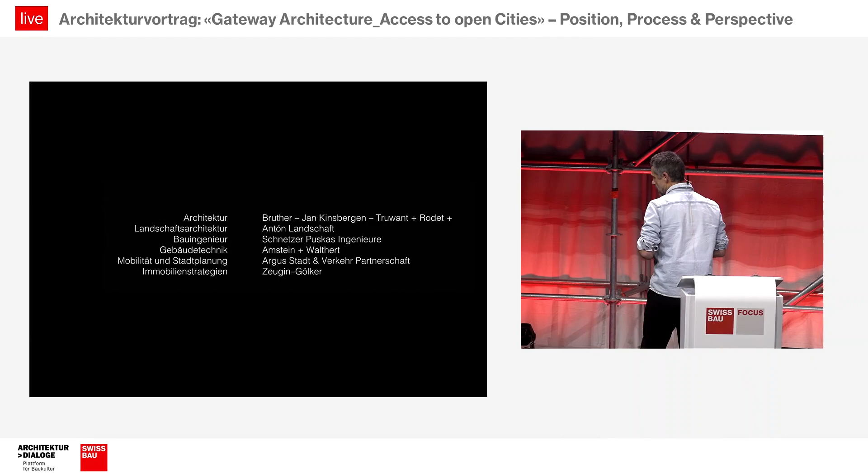That's not really a problem, but let's say maybe I should explain a little bit more about the context, and probably about the team, because for such a problem, such a project, this amount of issues, you need a team. And the team is, of course, quite crucial. In the team there are a lot of engineers, and at first, probably a set of leaders. So we are, let's say, one part of this team, Bruther.

And of course we have some fantastic partners, 2 of them, I mean Truwant+Rodet and Jan Kinsbergen. So it's not the first project, we did a set of projects, a set of competitions. We lost all of them. But we built a sort of common ground with a set of preoccupations.

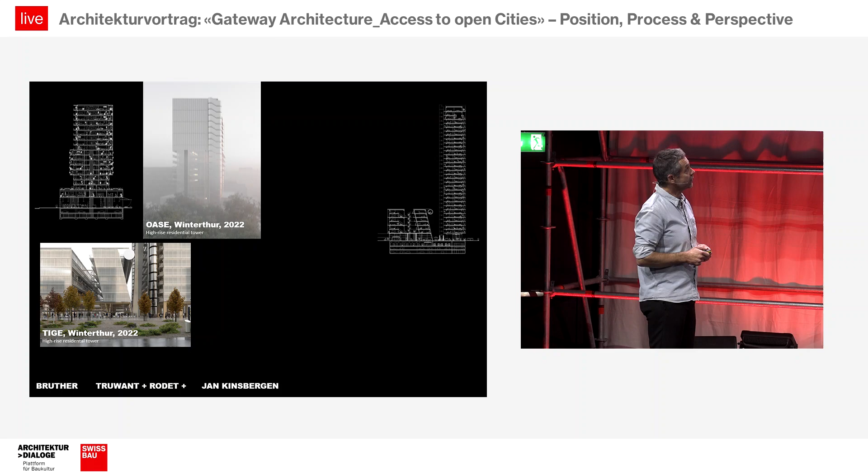So we did a lot of competitions for towers in Winterthur. I'm not really sure I have a precise explanation for that, but it was fantastic research about how to combine different types of program. And at first, let's say this urban preoccupation - how a really simple device, an architectural device, can transform the city or can amplify the city. So these were different types of competitions, and all the time it was a fantastic experience, fantastic collaboration, and fantastic discussions.

And then when we saw the application, we said, okay, we should go and we should try. Probably we are not, let's say, maybe we will be selected. And we've been selected, and it was a fantastic moment.

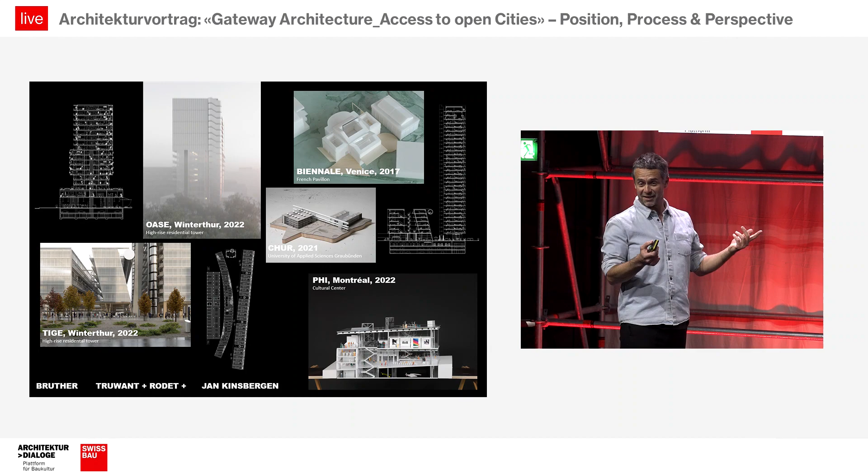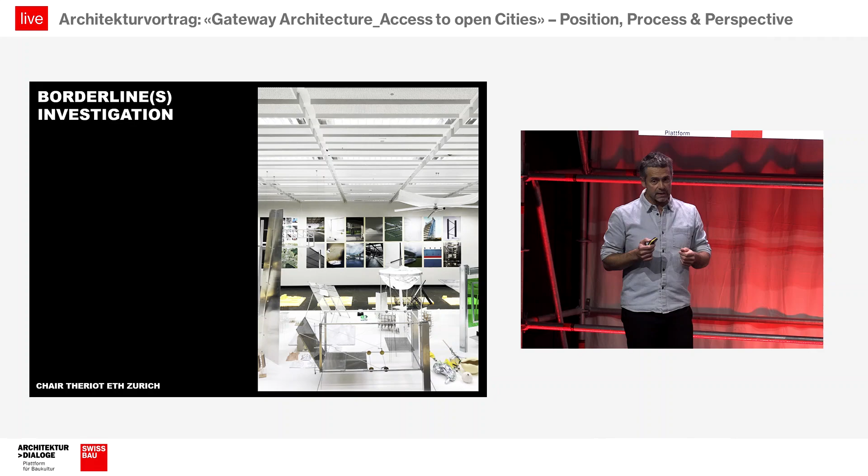Probably because we have this practice at ETH, we have some preoccupations, and Basel is one part of those preoccupations. So mainly, our preoccupation is air, comfort, lightness, multiplicity. This is more or less the topics we deal with every semester, and every semester we deal with a specific territory.

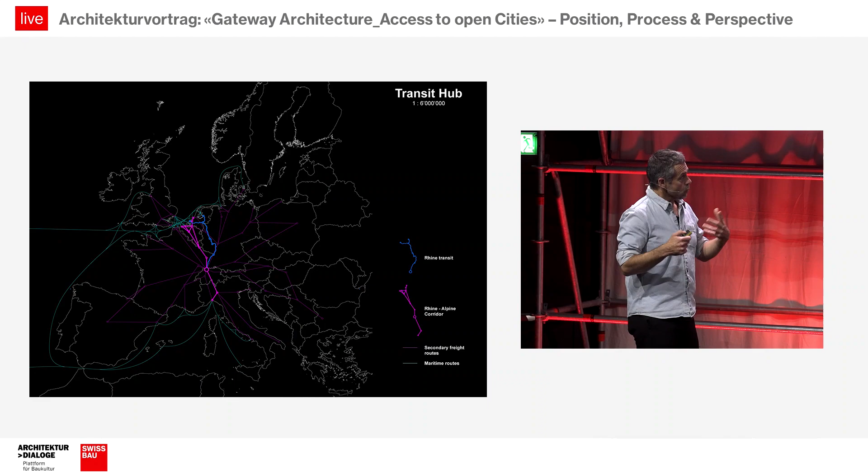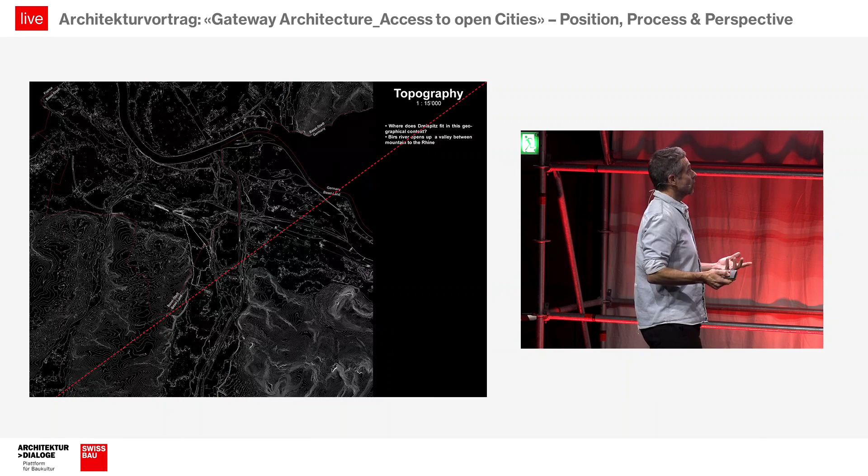And four times we worked with Basel, because we are quite stimulated with Basel. So we did a lot of research just to try to explain exactly what Basel is in terms of infrastructure and organization. Each document is not really important, but the main preoccupation is this urban question about how to transform the city, and what could be the tools to transform the city, in our case, just by dealing with constructions and buildings.

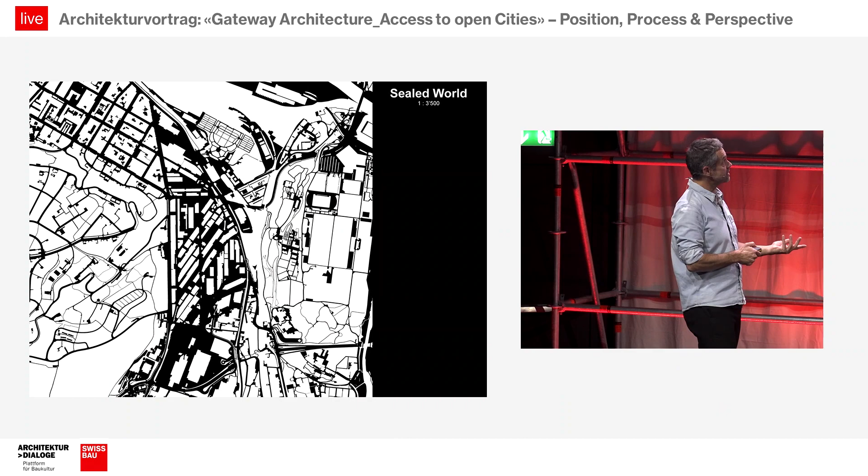So these are different situations, so probably you know this is the Dreispitz, about history, about how to transform, what about the density we should achieve, should we demolish or should we keep things, what about the climate, what about the future.

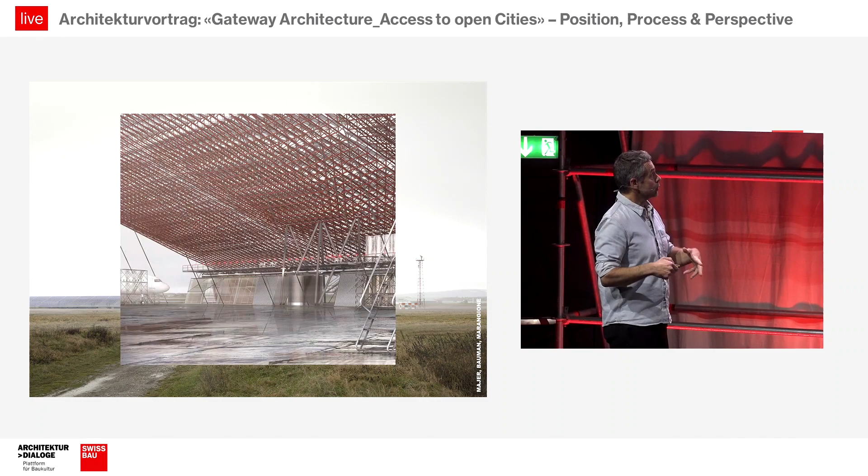So this is really a set of researches we did with students, who are not architects, or will be, or some of them are already architects, but just to see again how we can transform the city. Also because the airport is one part of the city, how to increase the potential.

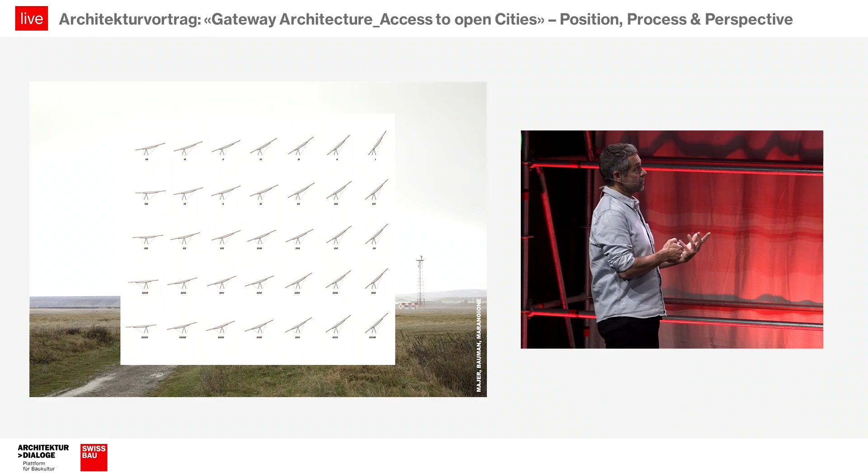Because we talk about gateway, and the airport is also a sort of hub, and also a place, a sort of entrance into the territory. So this is really not too long, considering the time we have, but just to say there are different situations in the city that we can transform.

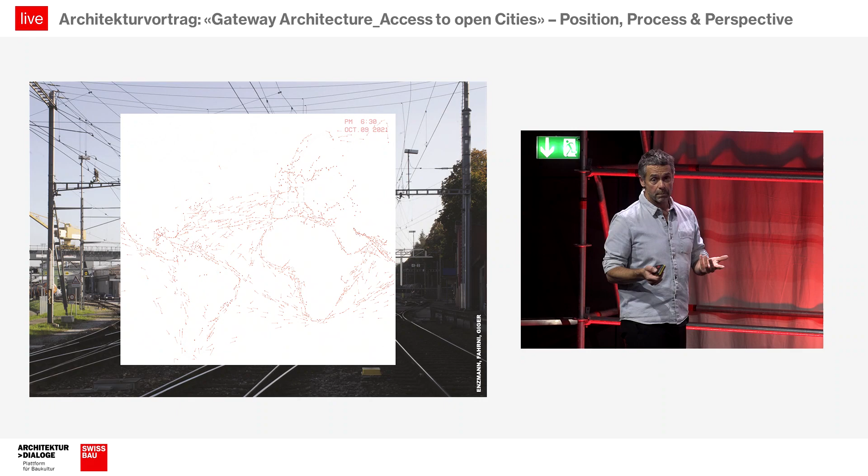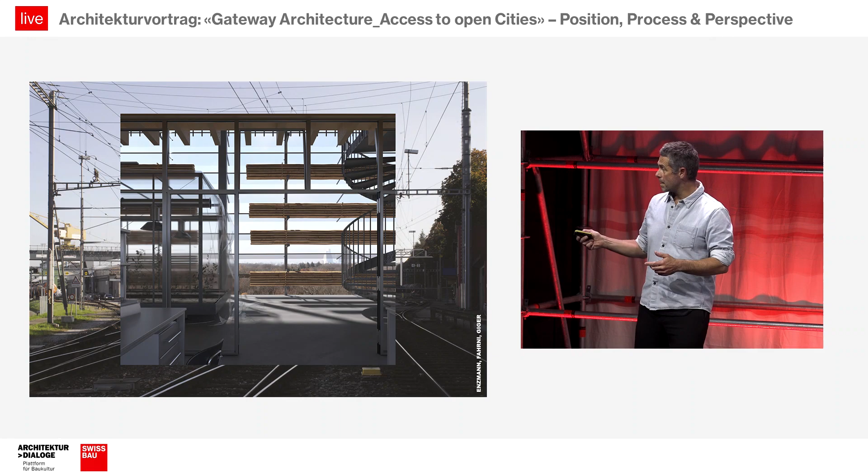That are part of the city, even if it's industrial plots, situations, but we have to consider them because they have potential, they have fantastic opportunities in terms of landscape, in terms of use, in terms of space. So this is just a set of different, diverse documents just to see the potential of Basel.

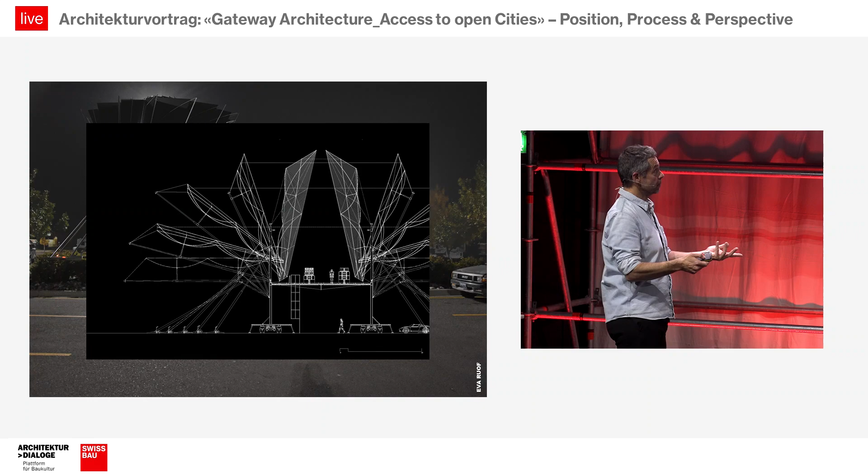And of course, I will try to go faster because there is probably too much, but the port is of course a part of this research, so how to produce quite specific infrastructures just to bring new uses, how to transform maybe

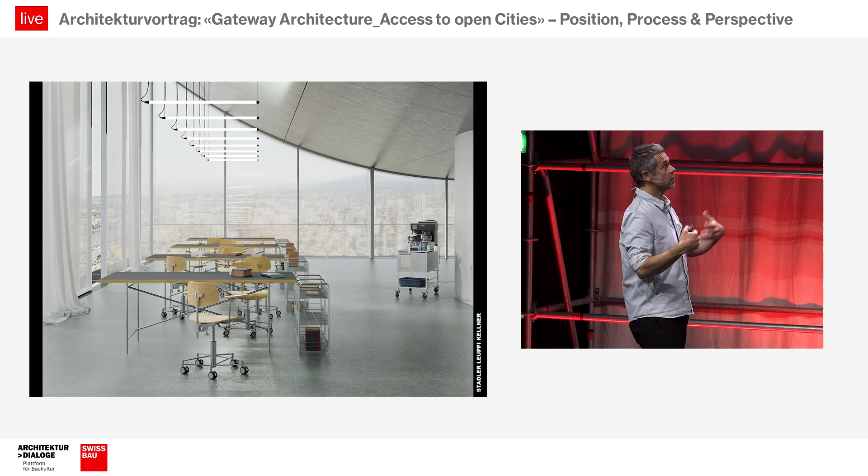the Novartis campus into housing, so that was a part of the process. But of course, each time it's asking questions about the future of the city and what are the potentials.

So I will probably not describe the images and maybe talk about temporary structures. So what is a space? Do we have to build for the next 100 years or do we have to build temporary structures? So this is just a set of examples.

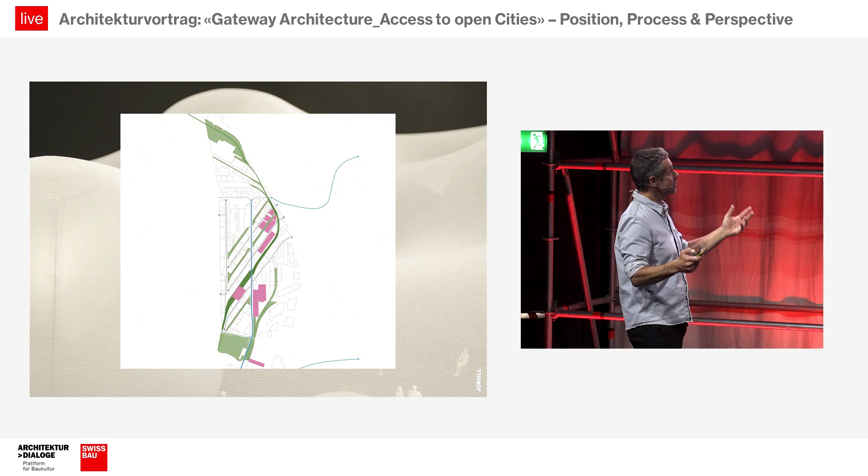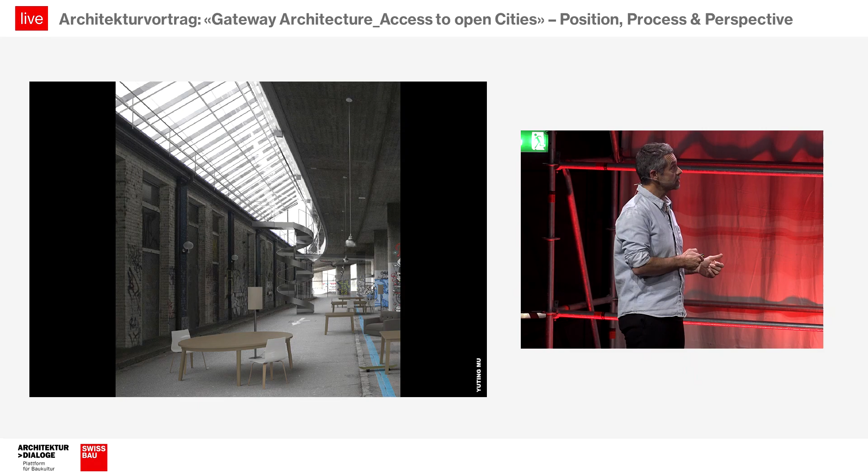Just also how to teach what could be, let's say, how to produce energy and how to deal with this kind of infrastructure. So a lot of images, just to talk about the city. This is probably what we try to deal with with the new generation, and just to say what could be the possibilities in terms of transformation.

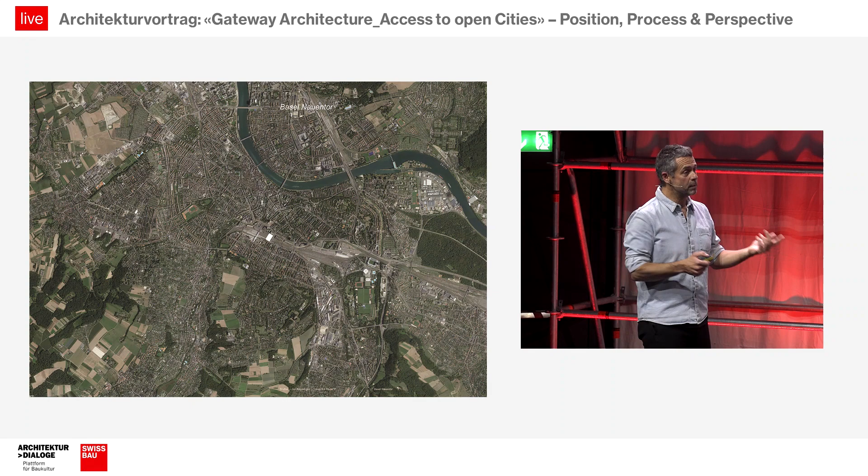So you know the place maybe more than I know, but this is a fantastic situation. This is a fantastic building, so you know it quite well. This is this sort of huge, dead infrastructure in the middle of the city.

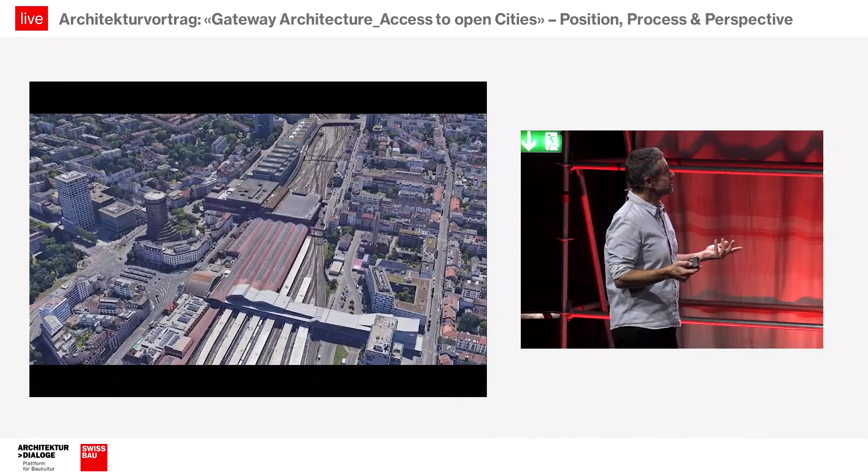And I think all the studies that happened before we won the competition were really crucial, to say there is an important challenge for the city just to reinforce the links between the two parts of the city.

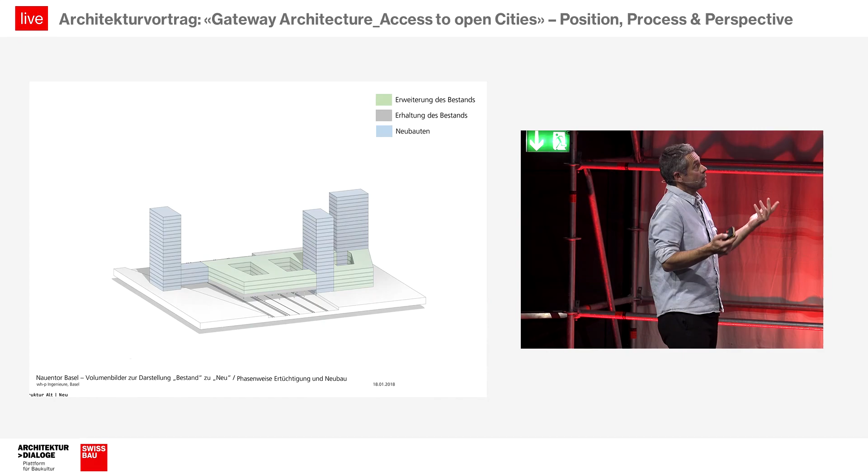So the brief was quite simple, quite efficient, and not really a lot of ways to escape, or let's say, the form is the form, but we have to explain the form. So that's, of course, our preoccupation.

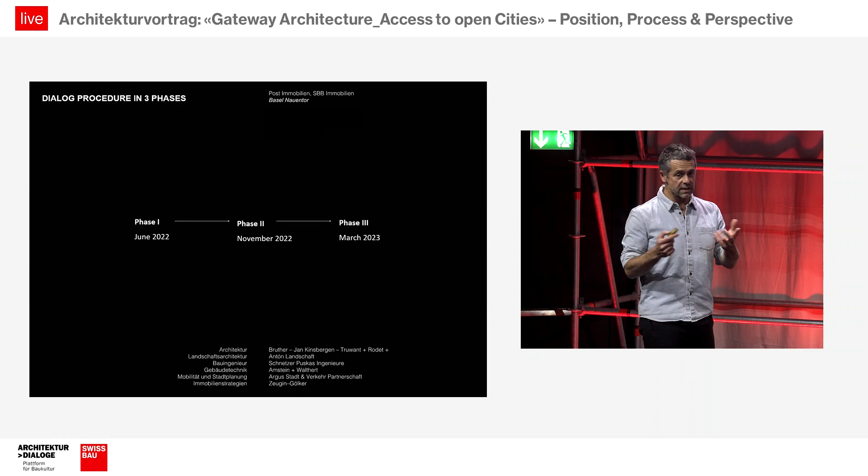Is the question the right one, to demolish everything and to rebuild? And for that, we had more or less 9 months to propose, to discuss, to analyze, and just to see exactly how this fantastic situation and this fantastic opportunity could be transformed, could be enriched, and could be more than what it is. So that's what we did.

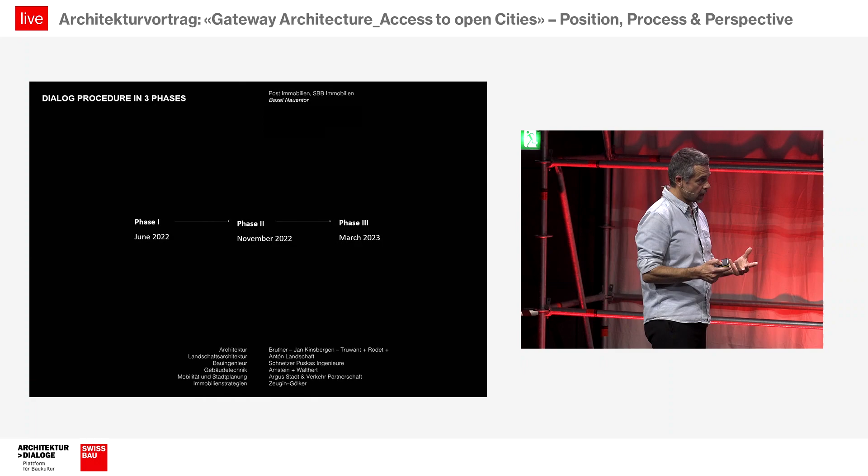And I think this dialogue, so of course, a competition, when it's 1 year, it's too long, for many reasons. But at the same time, that's a fantastic opportunity really to take time to think about the transformation.

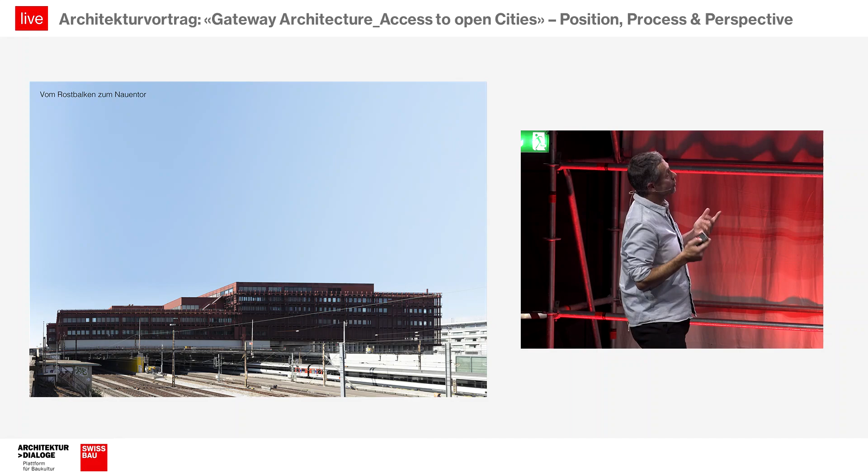So of course, from all of us, Jan, Charlotte, Dries, Stephanie, and all the team, the main question was, does it make sense to demolish this incredible infrastructure? That was really the first question we asked ourselves, considering that this is, okay, we can talk about the color, but the color is not really the main point.

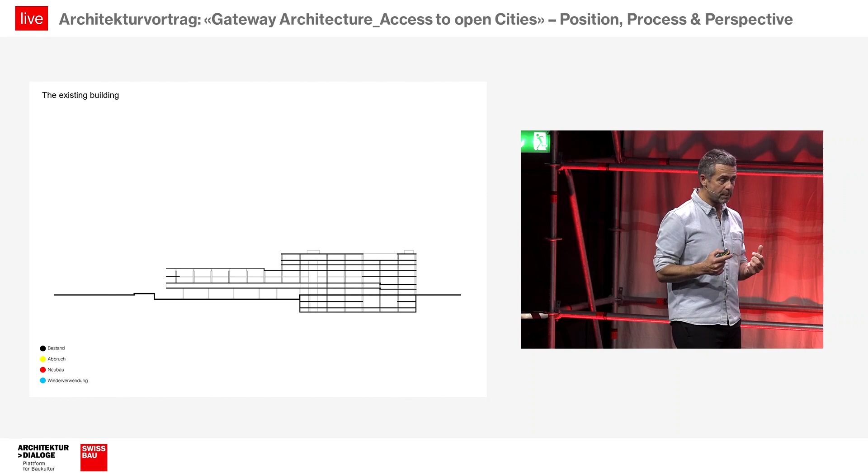It's just this fantastic infrastructure, the process to build it. So we did a sort of intense research about history, let's say why it was built like that, these amazing beams, so how to keep them. Of course, this was one part of the project, but let's say how to keep as much as possible.

And transforming the situation, keeping the main ideas that were developed, but just to transform and add and keep as much as possible. So of course, you cannot keep everything in a way, so we tried, but you can reuse, so it means that some parts of the floors, some parts of the columns, some parts of the beams can be reused. And that was more or less one of the main preoccupations we had.

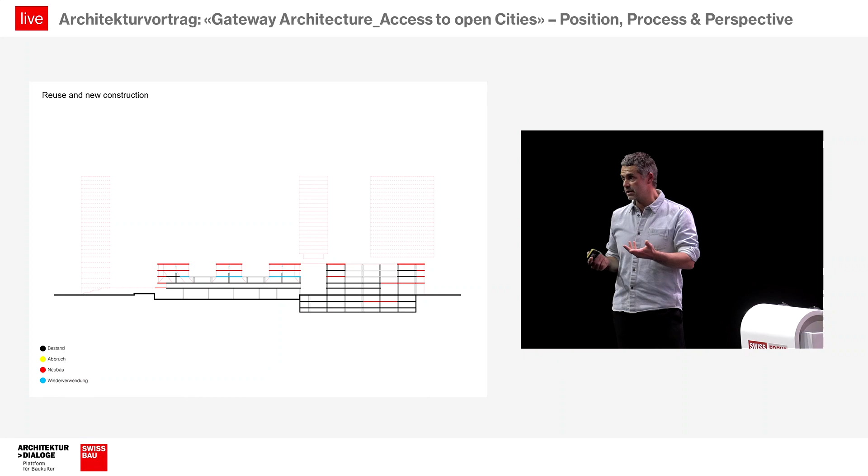So we opened this discussion and this debate with the jury. So it was, of course, a lot of questions because they already decided a long time ago to demolish. So that was really an interesting step.

In our case, this notion of infrastructure, as you said before, or open urban infrastructure was really the main preoccupation. So how to reconnect this huge logistic building with the city. Of course, we are above the railways, not so easy to connect something which is completely disconnected from the ground, but that's what we try to do to reinforce the relationship between Gundeli and Gross Basel.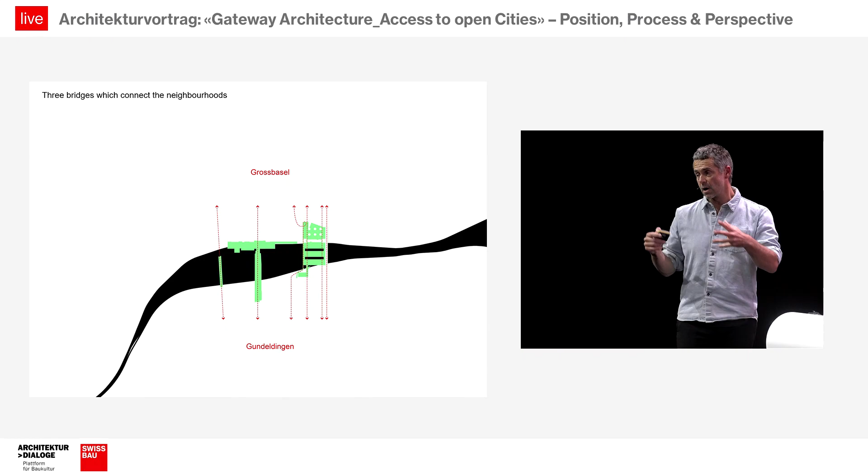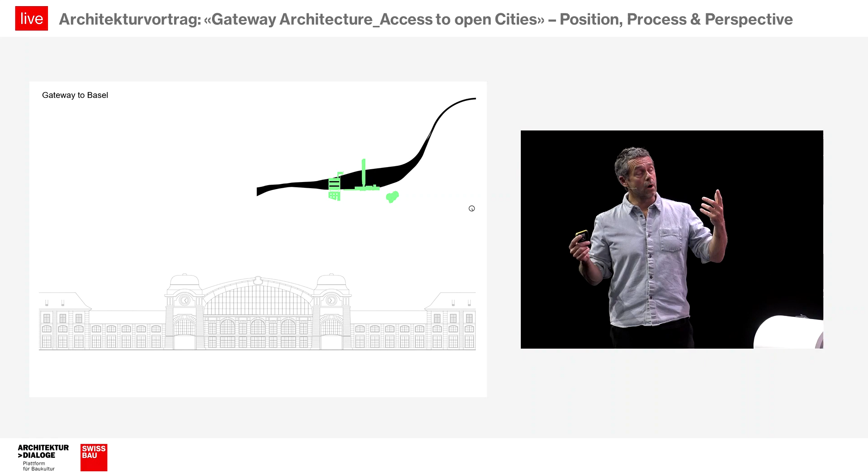So how to find all the means, the bridge, the pathways, and so on, just to reinforce and to use this infrastructure really as a hub for pedestrians, for bicycles, for cars, and so on. But really to consider that this space and this building has to relate the different parts of the city. So of course, with the main station, but considering all the rest of the different things.

This document is probably one of the crucial documents that we produced during the competition. The idea was, of course, not to reinforce just the connection from one side to the other one, but also to reinforce the link with this highway for bicycles, and just to relate this part of the city with Dreispitz and so on. So really to pass through.

Probably the first act was, in a way, to cut this huge building into three parts and to create a public space on the ground, not somewhere in the building on the first, third, or fourth floor, but just on the ground, considering that the city is first of all the relationship of the buildings with the ground floor. So this is really the basic scheme that we did, and then we try really to reinforce the identity of each part of the city.

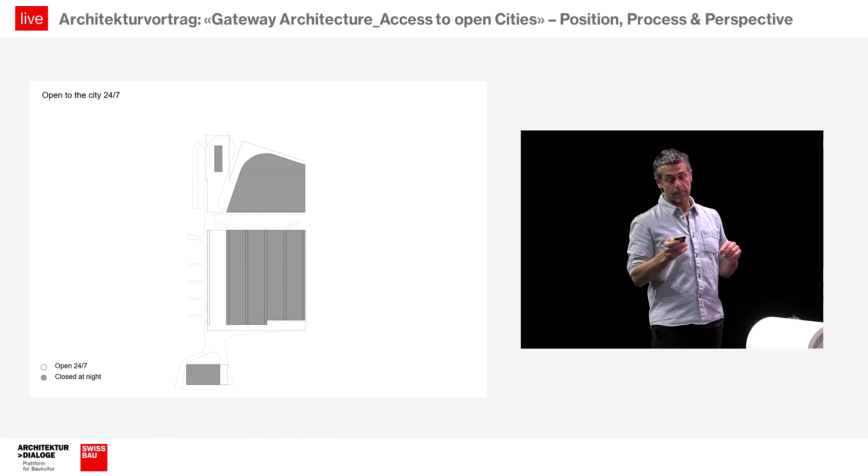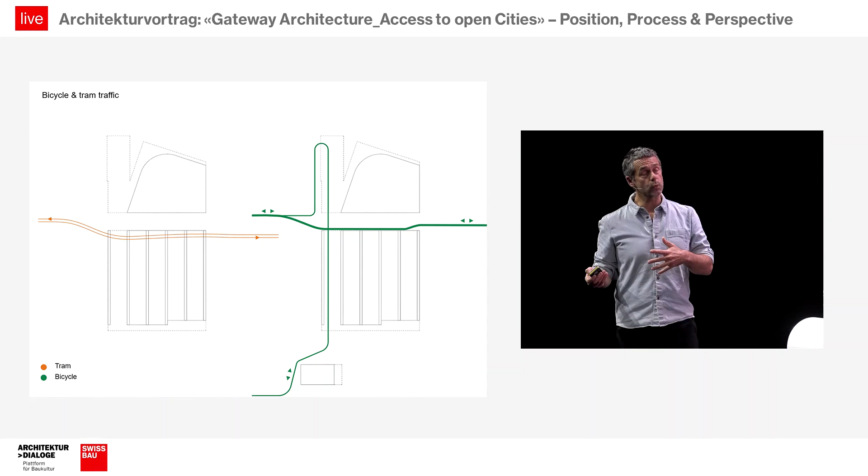And of course, considering this very simple scheme, how the people will pass through from one side to the other one, how the building will be animated by the transportation, by pedestrians, by the different connections with the streets, also, of course, with the tram station that we have below. So it's how to reconnect the different parts of the city.

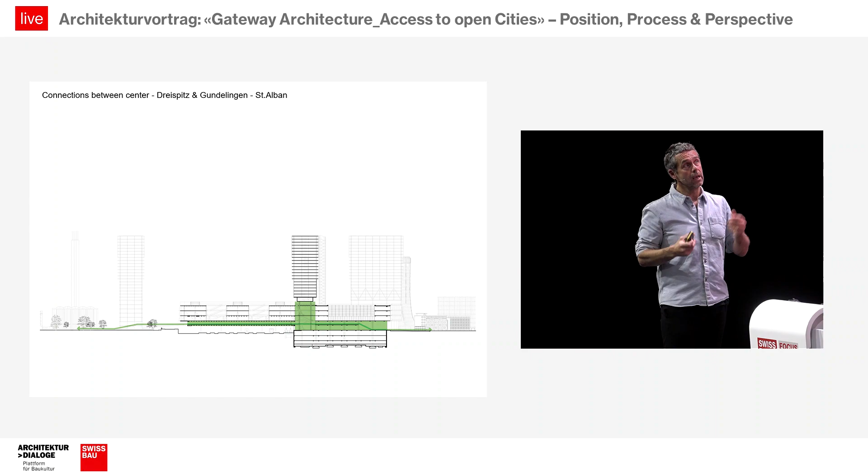So in this section, you can see the plinths. The center part, and the green part, is of course the public part of the project. Below, this green line, we have all the railways. So this is this sort of huge table that we had to keep in the project, and above, the different parts of the project with the three high-rise buildings that were defined in the master plan. So I think this document tried to express all the different means to reconnect, to pull the project to the ground, and just to reconnect it with the activity of the surrounding.

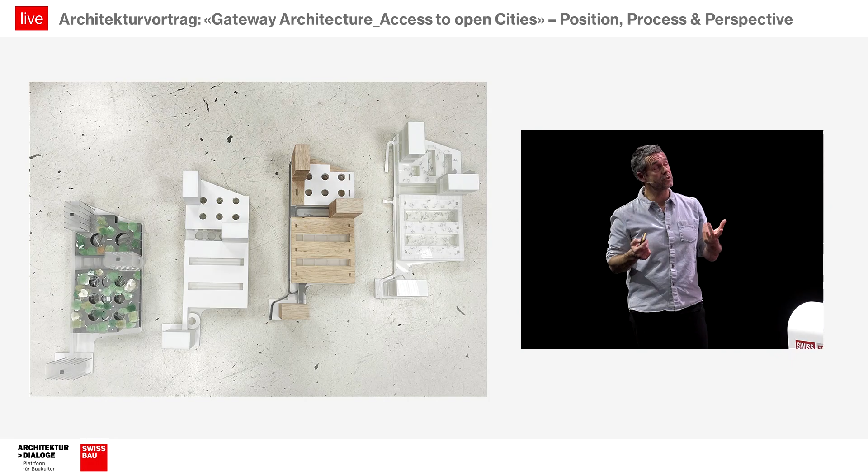So of course we did a lot of research in terms of volumes, in terms of how to, because this super fat building, you have to bring light, natural light. So we did a lot of studies, and this one is probably the first model that we presented for the first jury. Then, in a way, step by step, we try to define more and more what is so important to preserve, and of course, what is this gallery, this very simple device that will define, and that will probably be the heart of the project.

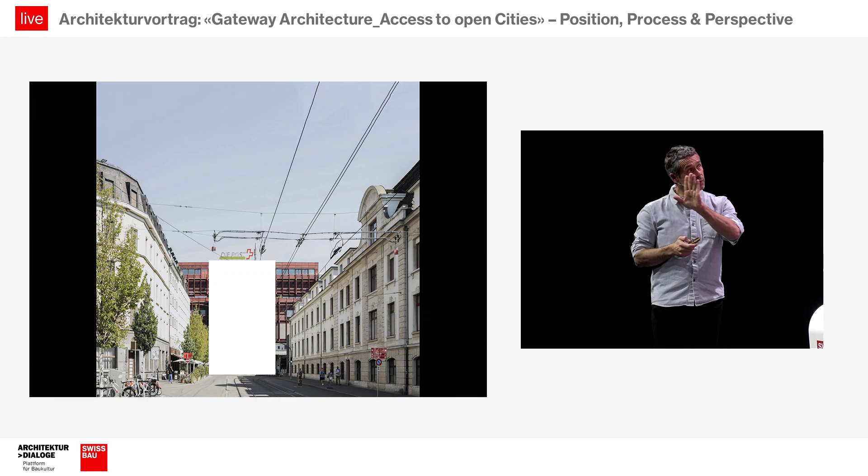So in our case, you know quite well this view, and in our case the goal is just to split these fat buildings in two parts, basically, and just to create this continuity between both sides of the city, following the network of the railways.

So this space is quite important, 20 meters wide and 100 meters long. It's an unbuilt space. There are a lot of spaces like that historically, and the wish is that this space can be 100 spaces or 1,000 spaces, meaning it could be whatever we really want to use it for.

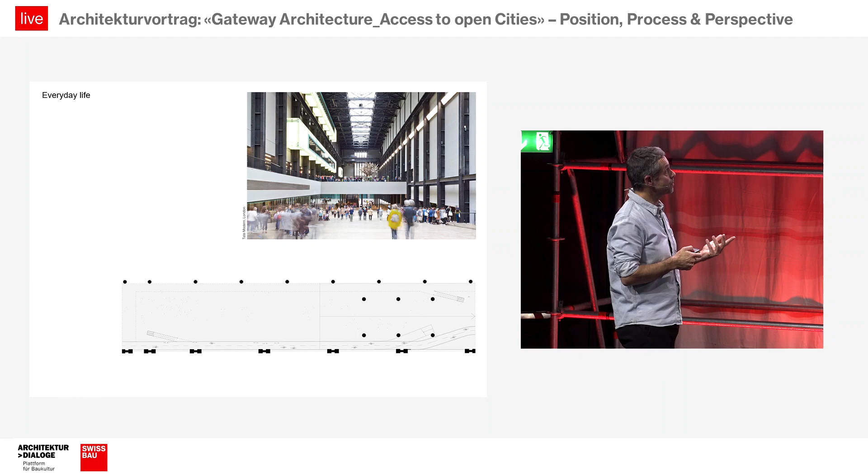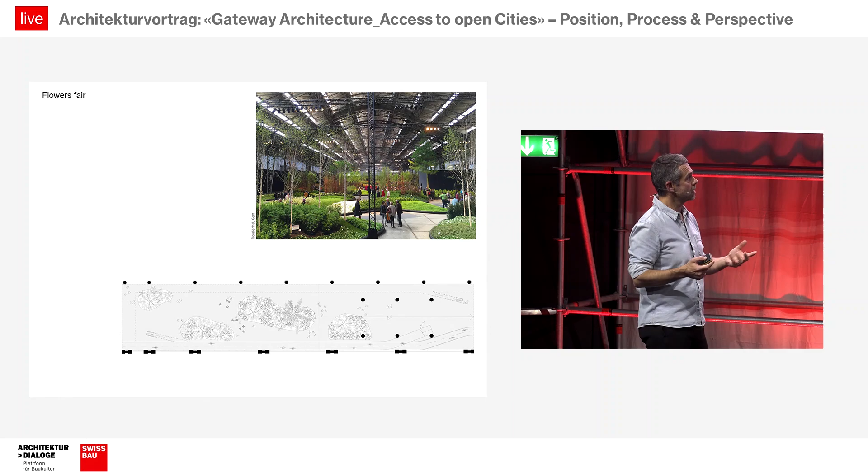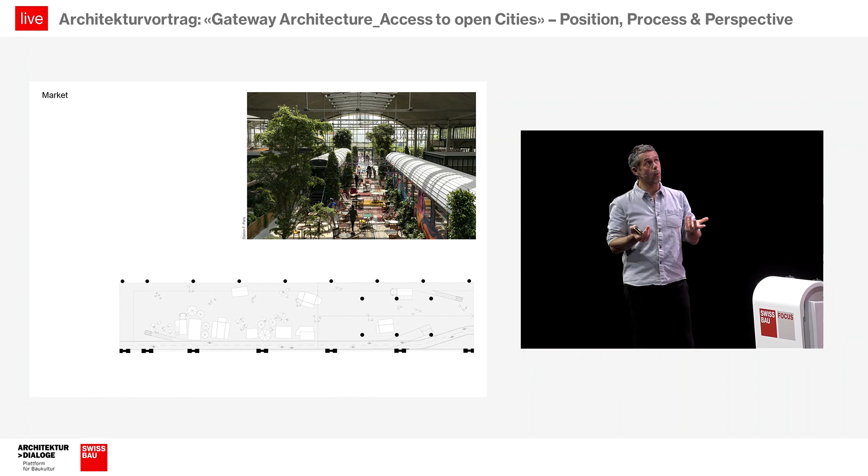So we called it the everyday life space. It means it could be an exhibition space, an art exhibition space, a concert, whatever we want. This is what we try to reinforce—that this is a public space, a public square, and this public square can welcome different types of events, like a flowers fair, a space that we can close, basically covered, that can welcome a huge amount of activities. So a public space, basically.

In terms of organization for the functions, I'm not completely sure that we have to jump into this detail, because I did not check... yeah, but that's probably not the right one. I have 1 minute, okay.

So we have a lot of things in this building. The main part of the competition, or let's say of this project, this is the blue part, and this is housing. So the housing part is, of course, above the plinths, and we try to split all the different functions considering the best location.

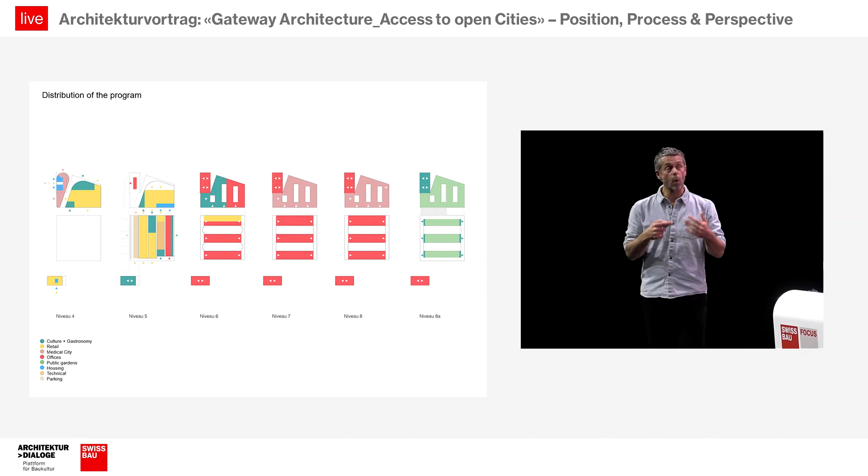But we know that probably this building will be built in 8, 9, or 10 years, so it means we will probably have to make it evolve. We have to find all the tools and means to transform everything until the end. This is why we call it open structure—the uses are crucial, but we also have to think about this capacity of the building to be transformed, to be something else than what it is at first.

So this is really about transformation—the transformation of the existing thing or the existing building in itself. This is just the basic organization of the ground floor.

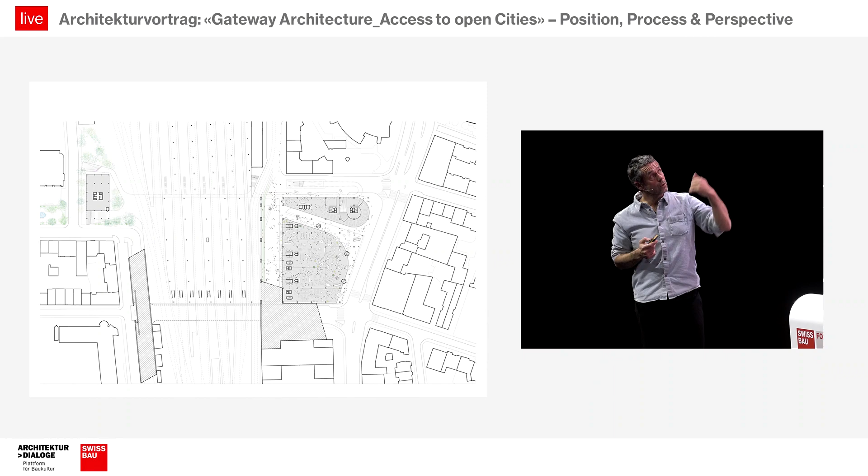You see the main station is in the top part of the document. Then the gallery will pass through and will continue into the other building. So the ground floor will probably be mainly dedicated to retail—let's say the most complex part of the project.

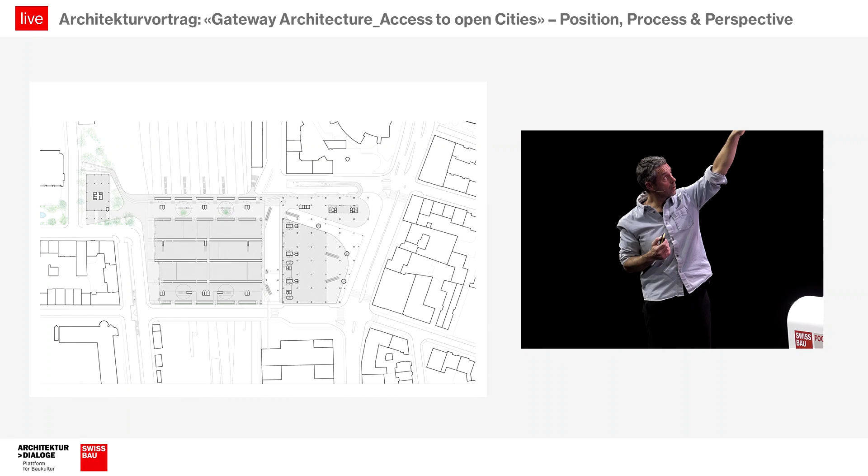This is this sort of structural table where you have this huge beam that divides the space into 5 cells. This is the level where we will bring the bicycles, which will probably use the ramp on the top part of the drawing, passing through the building and turning to reach the path. So there are different ways to use and pass through this building.

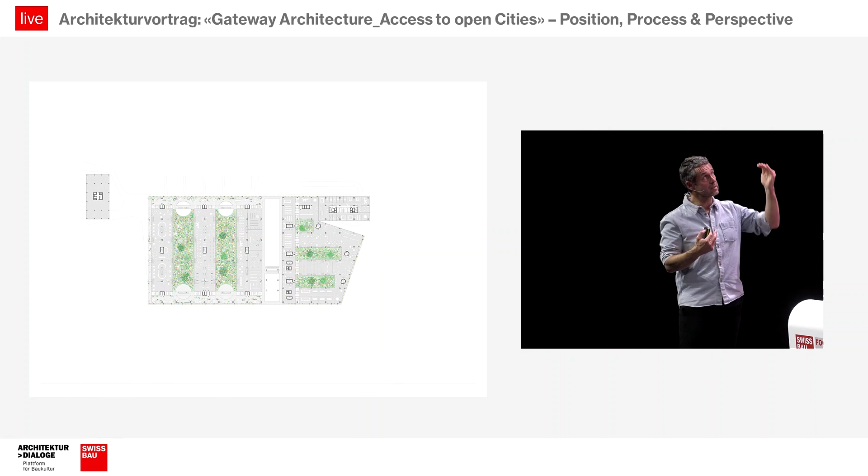Also in the upper level, where we have the office part, the office building—this is those 3 parallel elements with gardens in between. We have collective spaces and public spaces that will follow the space along the bridge. So we tried, of course, with this huge infrastructure...

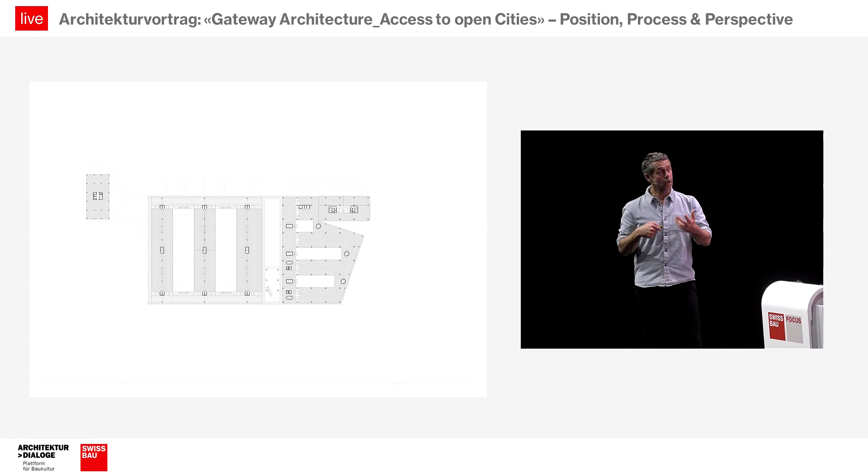The main challenge for us was how to simplify the device as much as possible, how to have a very clear statement in terms of organization, and to offer something that could evolve through time. We already know that the expectations and constraints, the different technical constraints related to the railways, will have an impact on the organization of the building, so this is really a continuous process to rearrange the space.

We have on the top floor this private and public space—a public garden. This is not the main space, but an extra space where you can suddenly have a specific relationship or a specific view considering all the surroundings.

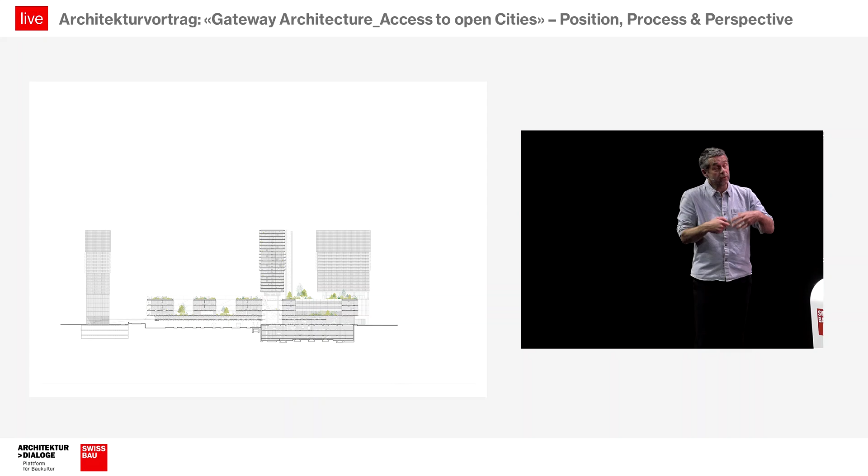So this is more or less where we are. All the documents that we shared today are what we did for the competition. The project already evolved, but this is a work in progress—that's just a normal situation. I think a really important statement was how to keep as much as possible, and that's what we try to express through this very interesting document.

So how to remove some parts, but how to reuse the parts that we removed. We try to keep and add just what we need. So this preoccupation is reusing an existing structure and how to keep as much as possible and add just what we need, not more.

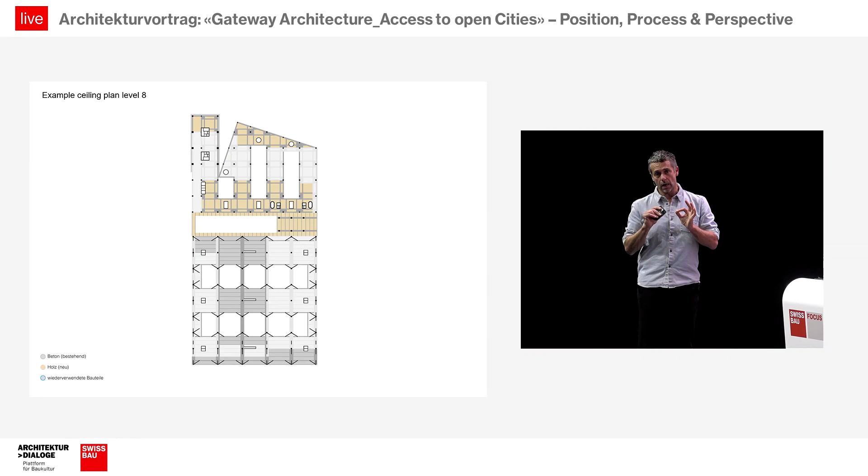So this is what we did during the competition, and we continue this research, let's say, how to optimize as much as possible. Our experience as a French office dealing all the time with this question of economy is, of course, a lever, let's say, just to go further.

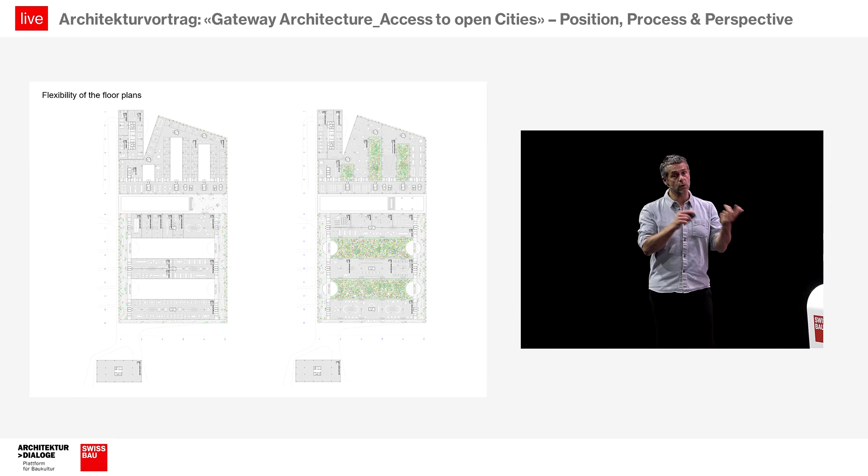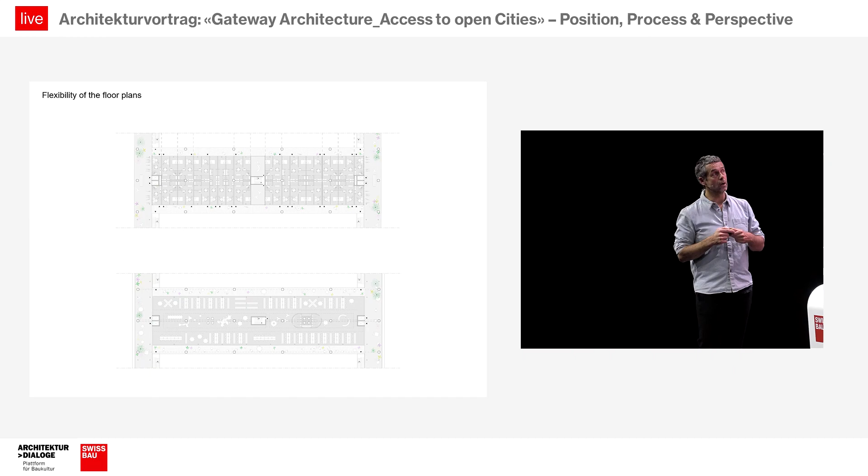So I think probably I shouldn't, but that's what I talk about, let's say, reversibility. How a space, which is an office space, can be transformed into a housing building. So that was also a preoccupation that we shared, and I think it's quite crucial that we try to conceive infrastructures that have this capacity to evolve in terms of use, in terms of space, but by keeping as much as possible what it is.

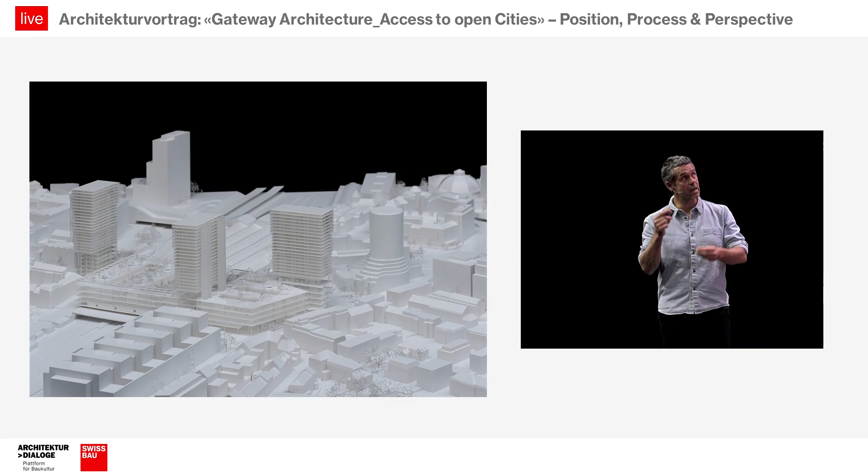So this is just the model. This is, of course, what is important to keep. This is what we try to do, creating links with the city, restoring, let's say, what disappeared, or the relationship between the ground and the building. And that's all.

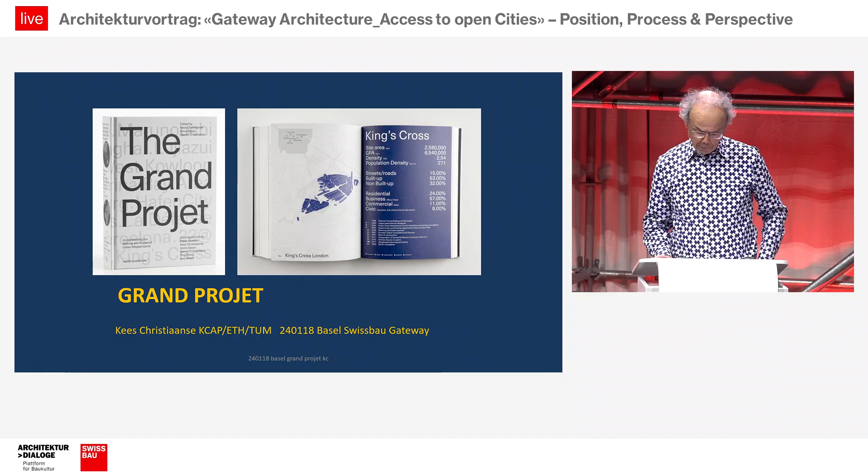So I got the title Gateway Architecture, Access to Open Cities. It sounds a bit contradictory. Gateway suggests the transition from something gated to something open, or the other way around. Most gateway projects tend to be rather gated, like for instance La Défense in Paris, which was one of the 8 projects of our Grand Projet research we carried out at ETH Future Cities Laboratory in Singapore.

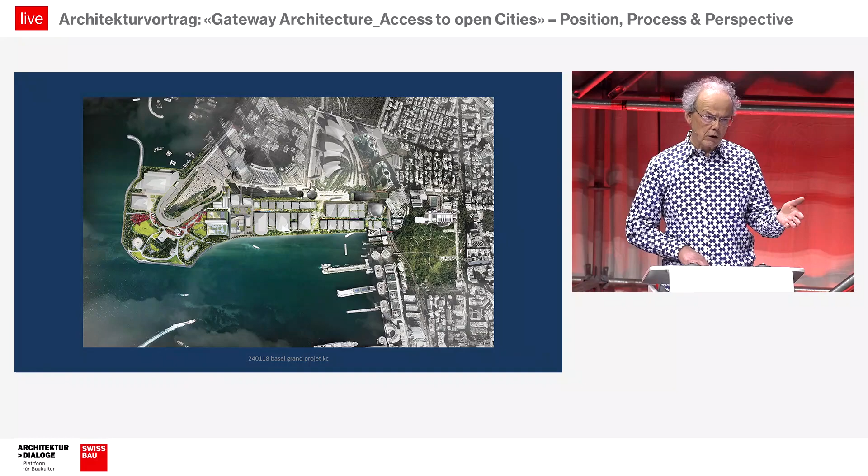And of the 8 projects, there are some more interesting gateway projects, if you like. For instance, West Kowloon in Hong Kong, comprising a public transit hub around a high-speed terminus to China, which actually is a giant covered shopping mall with interior connections to multiple buildings, among which Xiqu Centre and Herzog and de Meuron's M+ Museum, whose openness is threatened by Chinese censorship and, of course, by the shopping mall. There are no gateways, actually. Most of the time you enter into a shopping mall.

While La Défense has become a sheep in wolfskin, it gradually evolves from a functionally segregated modernist ensemble into a more open mixed-use urban centrality. While Kowloon embodies the Asian ideal of super-density, consumer-cum-transit condition. These 3 projects each are representative of their time and place, but also of urban transformation potentials after their disadvantages have been detected.

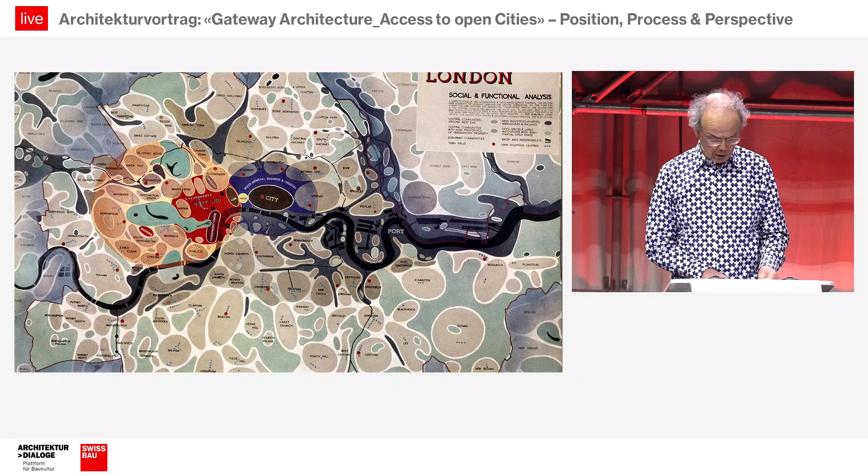A further observation is that although these are places of arrival, maybe except for La Défense, which is the least an arrival place and the most gateway-like, they are not exactly gateways. We actually arrive often by underground tunnels in the middle of the city and not at a gate. This is even so in many European airports. In the polycentric urban condition, you see here a map of the Ruhr area that we drew in the spirit of the previous London map by Patrick Abercrombie, which many cities characterize. One can better speak of complementary centralities than about gateways.

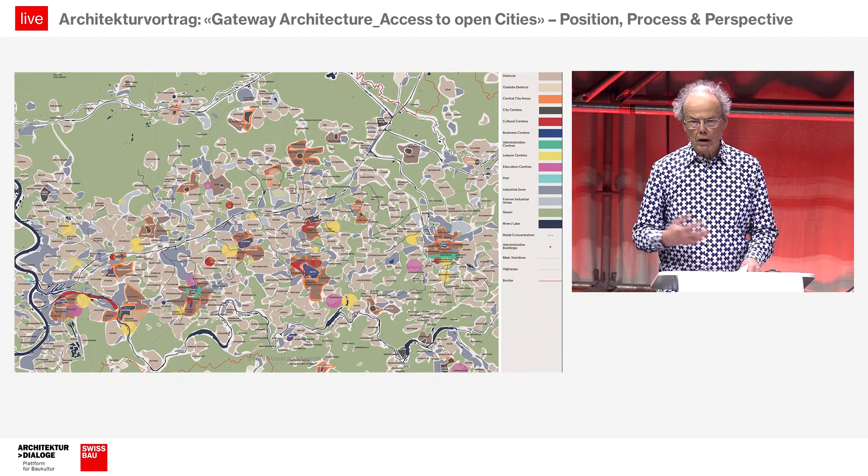Polycentric centralities are much more important in the contemporary city than the notion of gateway. Singapore has decided to follow the path of polycentric transformation.

Next to the central core in the middle, there will be three more centers on the island: Woodlands in the north, the gateway to Malaysia; Changi around the airport, also a gateway if you like; and Jurong Lake District, the terminus of the future high-speed railway to Kuala Lumpur, Bangkok and Kunming, at the edge of the industrial port and the innovation districts.

In the master plan for Jurong Lake District by KCAP, we first compressed the given footprint of the quarter, creating green islands in the lake instead of buildings, which meant the density of the build-up area had to be increased to a maximum.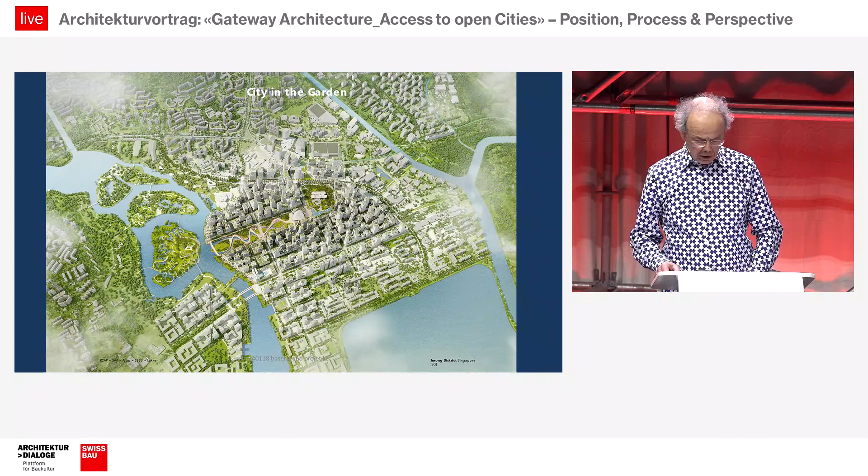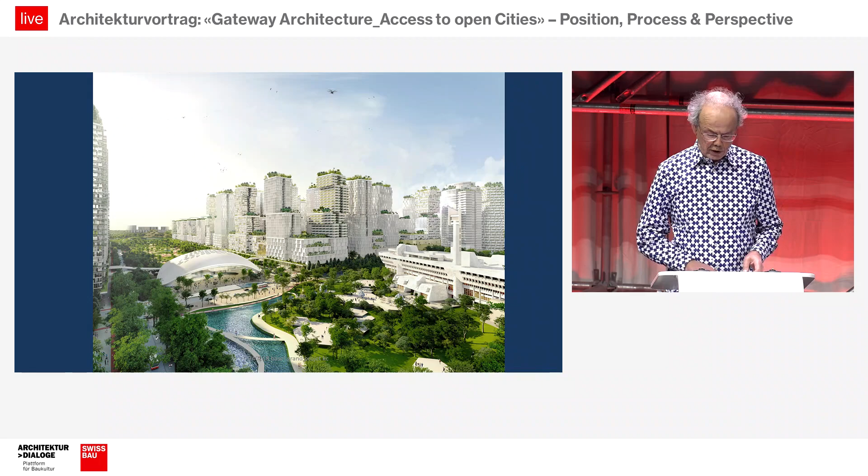Then we created a generous central park through the length of the quarter, under which lies a large box containing the high-speed railway station, as well as bus terminals, parking and logistics. This also prevented the creation of multiple mutual dependencies - the station and the quarter can be developed fully independent of each other. Preventing dependencies is a very important approach in grand project planning.

Are we going to have a demonstration?

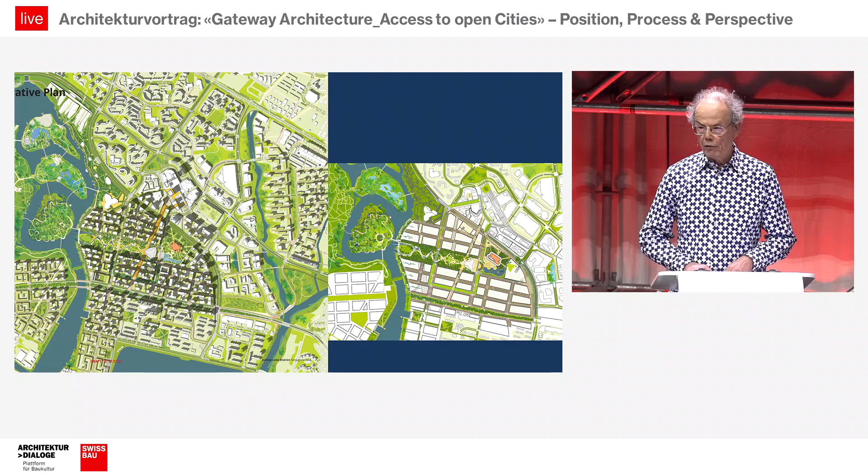The rest of the quarter, which has a favorable footprint between blue-green and built volume, is divided into urban blocks with narrow multi-directional streets oriented towards the general wind direction in order to provide maximum shade and maximum wind, contrary to what we want to do here.

Streets are designed in a flexible way in order to gradually evolve to a car-free condition in the end situation. The ground floor and mezzanine levels of the blocks are not only open for active street fronts, they are also porous in order to allow passages, which may be covered horizontally but open to ventilation vertically, allowing for inner block labyrinths in which larger institutions like schools or clean industry can be housed.

This would be very good for your project, this block.

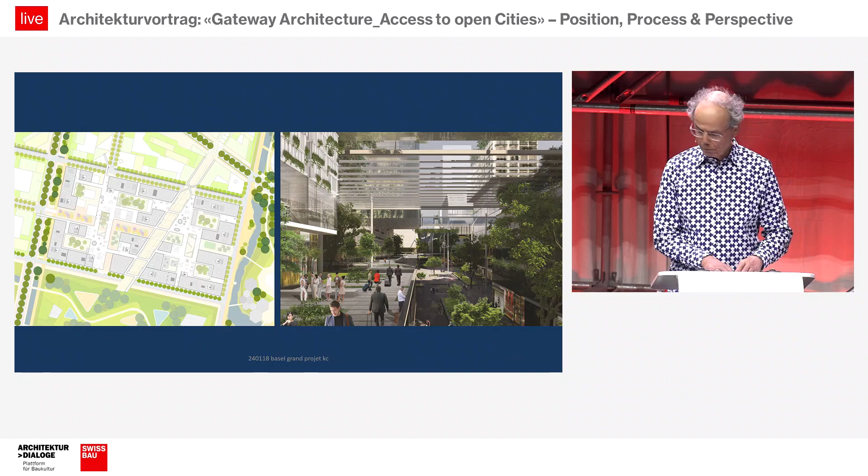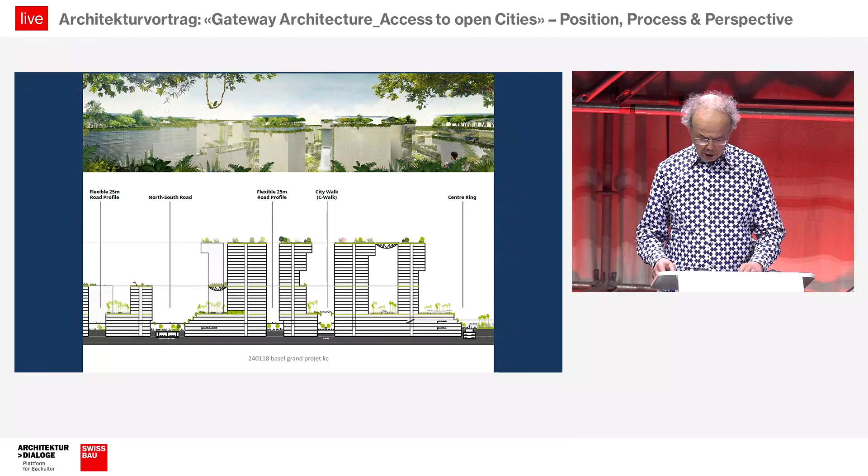As the maximum allowed height is 120 meters, due to airspace and industry constraints, all buildings are precisely 120 meters as we prescribed, covered with a roof garden to characterize the quarter with a hovering green carpet. In the wake of recent experiments in naturally ventilated housing typologies, access spaces of buildings are in the open air and individual aircon units are replaced by district cooling, as cooling is the highest energy consumer in Singapore.

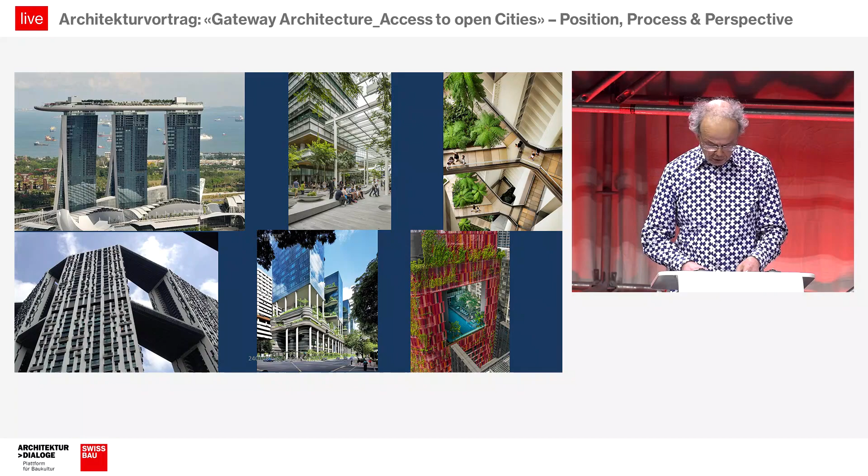As you can see, there is no specific gateway architecture. The quarter develops more into a coherent urban neighborhood and center for its surroundings, well knowing that Singaporean architects, as you can see here, will try to go as far as they can within our urban design guidelines.

In relation to the previous projects, which all run into 6-digit GFA square meter numbers, the Europa Allee in Zurich is peanuts with about 200,000 to 300,000 square meters, depending on what you consider as Europa Allee. It's more like the extension of a village center. It is primarily not designed as a gateway ensemble.

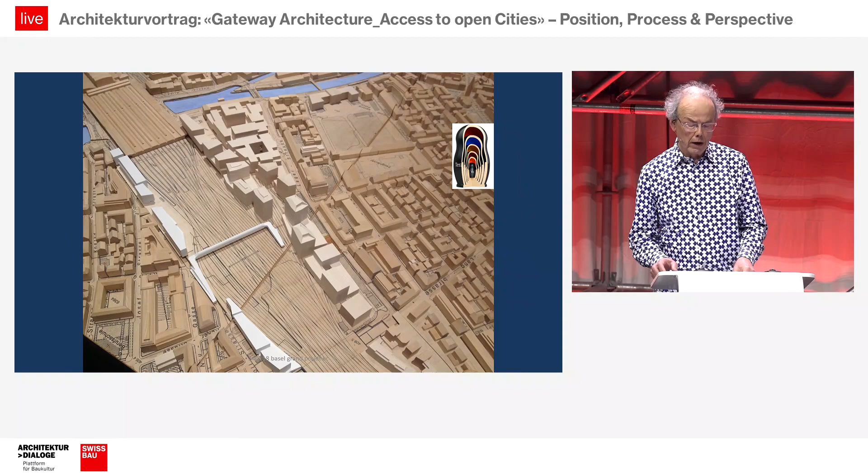KCAP tried to create an integration of the area with the surrounding street pattern and quarter, which continue into the scheme. Thus, a diagonal boulevard with a wasp waist in the middle connects Zurich main station with the Langstrasse, ending at a square in the former red light district.

The other streets are the prolongation of the neighborhood streets, and not to be forgotten, along the railway, the platform is prolonged, creating a kind of walking quay along the tracks, rendering the quarter most porous, including some bridges.

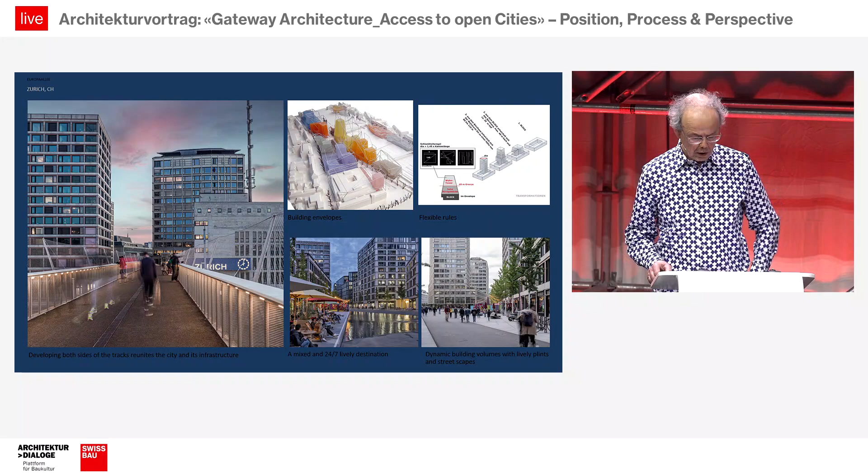In our initial proposal, a dynamic massing model was to determine the volume of the buildings. The main parameters - shade, daylight, and solar exposure, as well as view lines and noise protection - provided envelopes within which architecture projects could freely develop.

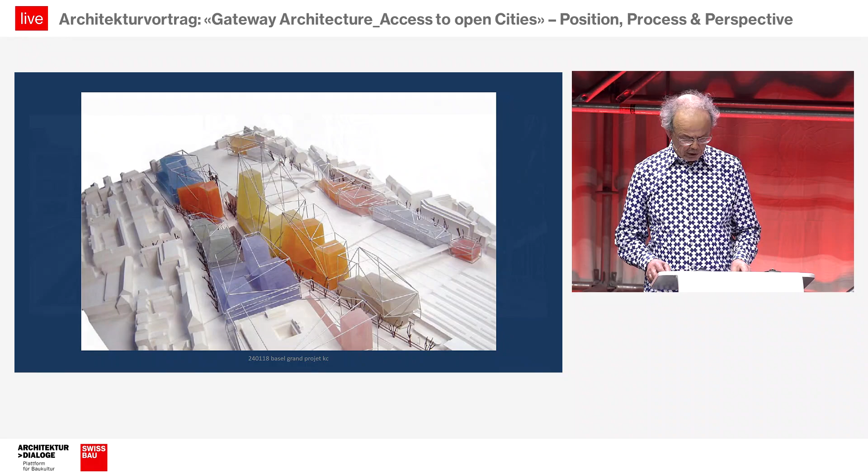However, political motives pressed for a maximum height of 40 meters for the buildings, with an exception to 60 in the middle square. Contrary to the initial gossip about these kinds of projects - that they are too large scale, inhuman, monofunctional - this project contains about 40% housing, 40% offices, 20% amenities and social infrastructure, like a school and a cultural center with cinema.

In the meantime, the project has been fully accepted, rather as a vibrant extension of the city center and not as a standalone project.

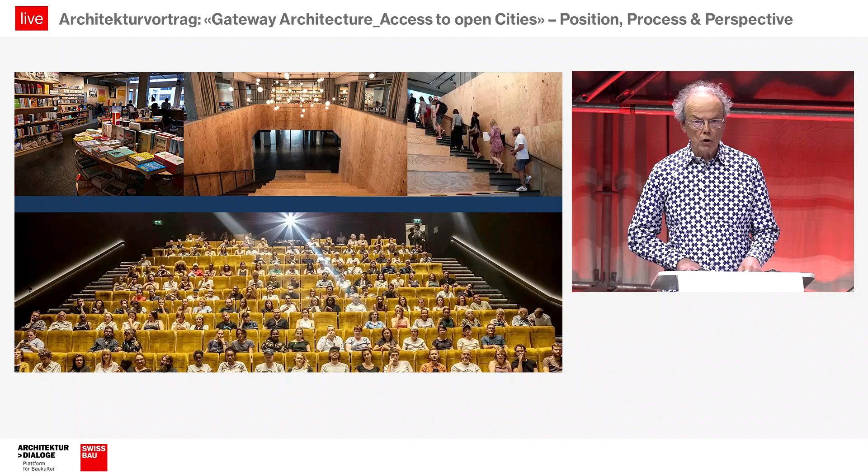Contrary to King's Cross, Google does not have her own building in the Europa Allee, but rented a considerable number of buildings there, which they wanted to connect by bridges over the streets. We were able to prevent this. Google employees have to go to grade level, through a lobby, then go out to the next building while activating public space.

Clean industry like Google returning to the city is a very good trend against hermetic, car-dependent suburban development like Apple's headquarters, which is gated as the iOS operating system.

In 2009, I was curator of the Rotterdam Architecture Biennale, for which I chose the theme Open City, which was also a tribute to Jane Jacobs, who did not coin the term in words, but who described and analyzed the characteristic of an open city condition for the first time.

Her plea also included the right to access to the city, as well as to resources. In European urban design, these characteristics include active street fronts, diversity in design, typology and program, affordable housing, mix of working and living, walkability, placemaking, and public transit connectivity. Luckily, these principles have become mainstream, even increasingly in suburban development.

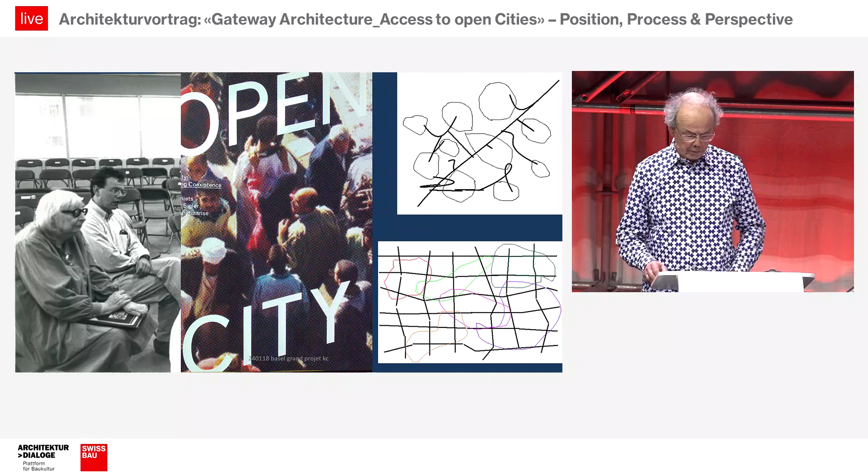Unfortunately, the original meaning of open city, namely a city in a war zone which the conflicting parties have agreed not to attack in order to protect refugees and citizens, is not yet on the agenda in Ukraine and the Middle East, where both civilians and urban structures are under attack.

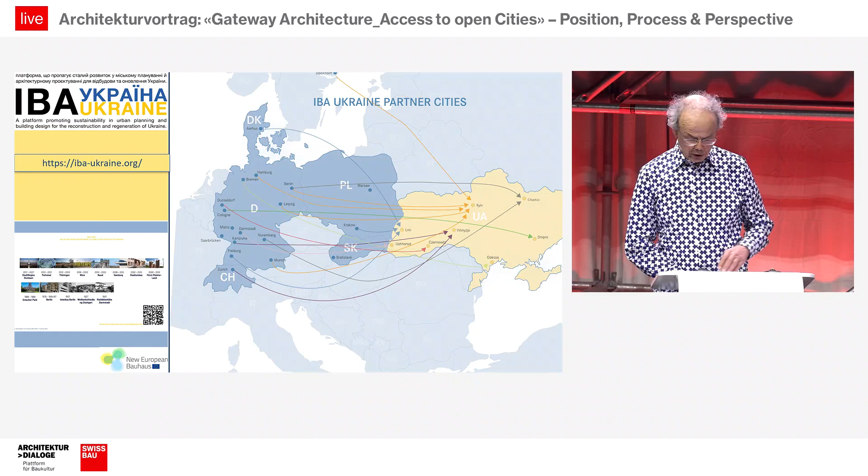Despite this, we, an international group of architects, planners, cities, government agencies, schools and NGOs, are taking the initiative to set up an IBA, an International Building Exhibition, in Ukraine according to the German model, which initiates and implements sustainable reconstruction projects on smaller and larger scale across Ukraine under the patronage of the new European Bauhaus. As we already have engaged several twins of Western European and Ukrainian cities, we would also like to invite the city of Basel to join this initiative. Thank you very much.